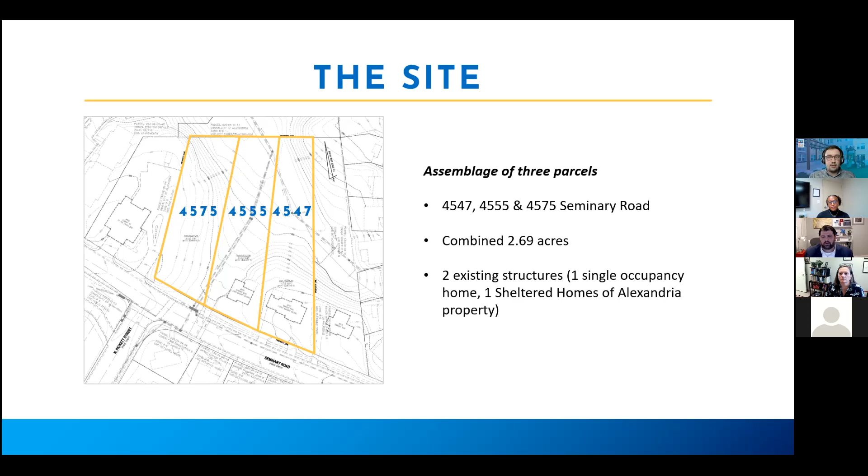So if we look just at the site, AHDC's project on Seminary Road is located on the west end of Alexandria. The project involves the assemblage of 3 parcels at 4547, 4555, and 4575 Seminary Road. In total, by combining these 3 parcels, we are creating a developable site of approximately 2.69 acres.

Currently, there are 2 existing homes on the site. 4547 is a single-family home owned and operated by Sheltered Homes of Alexandria, a local nonprofit that provides housing for individuals with intellectual and developmental disabilities.

They own and operate a number of group home and congregate living homes throughout the city. As part of this project, the current residents at 4547 Seminary Road will be relocated and will continue to receive services through SHA in the city. At the conclusion of the project, all residents will have the opportunity to move back into the new SHA units that are part of the project.

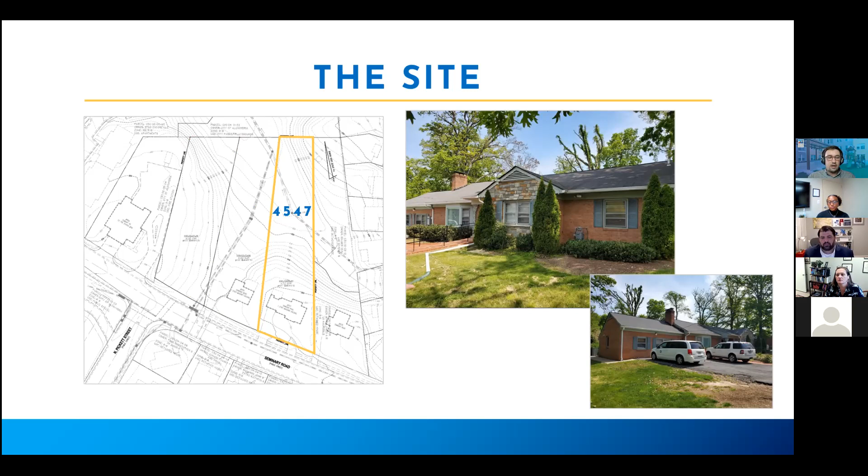AHDC and SHA recently completed the Bellefonte redevelopment in the Del Ray neighborhood of Alexandria. AHDC is excited to have the opportunity to partner with SHA on another project.

Moving west on the site, the second existing home is at 4555. This parcel is owned by a third-party private landowner.

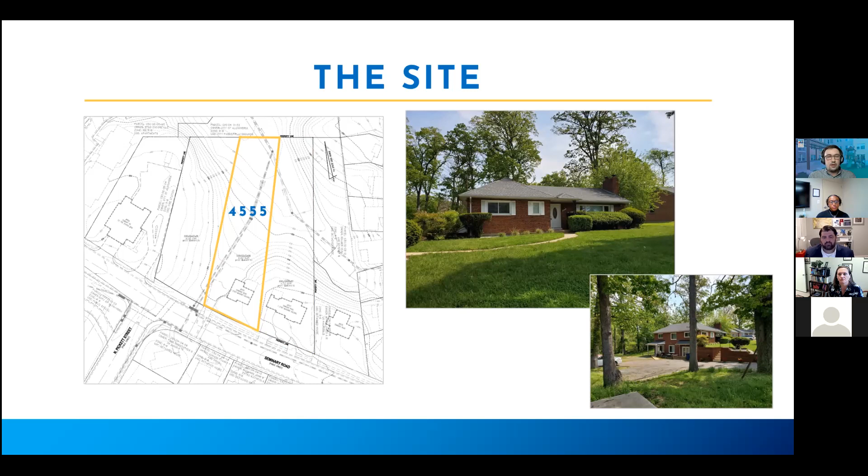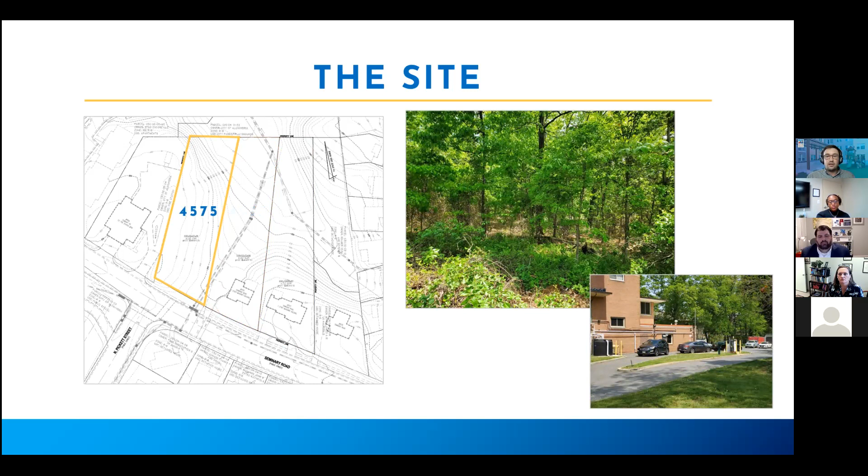Finally, the parcel furthest to the west is 4575 Seminary Road. This is a city-owned vacant parcel. At this point, it is mostly wooded and sits next to the parking lot of the fire station, immediately to our site's west.

Another feature of the site that made the design a challenge is a wetland of minimal ecological value, as determined by the Army Corps of Engineers and the Virginia Department of Environmental Quality. This is located at the northwest corner of the site. As part of the development, we are maintaining a 50-foot buffer around the wetland in which we are not planning to build.

Finally, the site topography has generally been a challenge and will require regrading in some locations to allow for the drive that is internal to the site and for the homes.

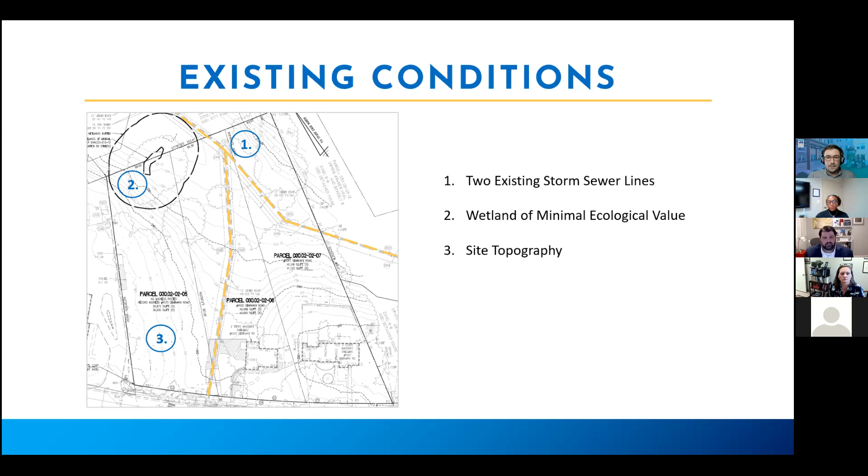Before moving on to our most recent design, I do want to discuss how we arrived at our proposal today and the evolution of the project. We've been working on this project for more than a year, and our first official submission to the city was in September of 2020. At that time, we proposed a larger multifamily building with approximately 52 rental apartment units.

Our initial design had some issues that didn't make it a good fit for this site. First, we received pushback on the scale of the project, specifically the larger rental building on the western edge. Second, the entrance off Seminary, which was not part of any signalized intersection or aligned with Pickett Street, was not acceptable. Third, as we would later identify, the multifamily building was proposed to be built directly on top of the wetland at the northwest corner of the site.

These issues required a reanalysis of the site and our development plan. This led to our second submission in February of 2021. This submission was significant in the life of the project because it saw a shift to a 100% ownership project.

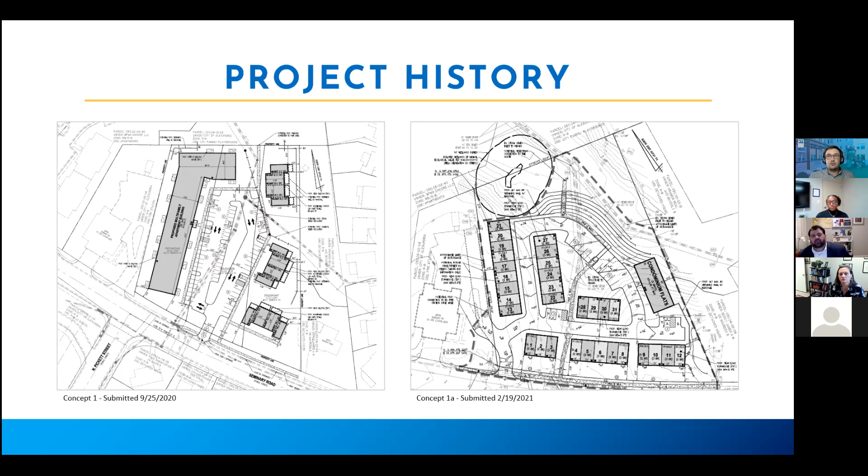In this concept, there is no rental housing on the site. This design avoided many of the previous pitfalls, such as building in the wetland and the location of the site entry, which in this concept, we adjusted to align with Pickett Street at a signalized intersection.

After this submission, we continued to revise the design. We submitted something called Concept 2 to the city in May of this year. The layout of the site remains similar, but our team started adding details like landscaping and architecture. After conversations with the fire department, we also created a separate entrance to the site to ensure that the fire station maintained complete control over their existing entrance.

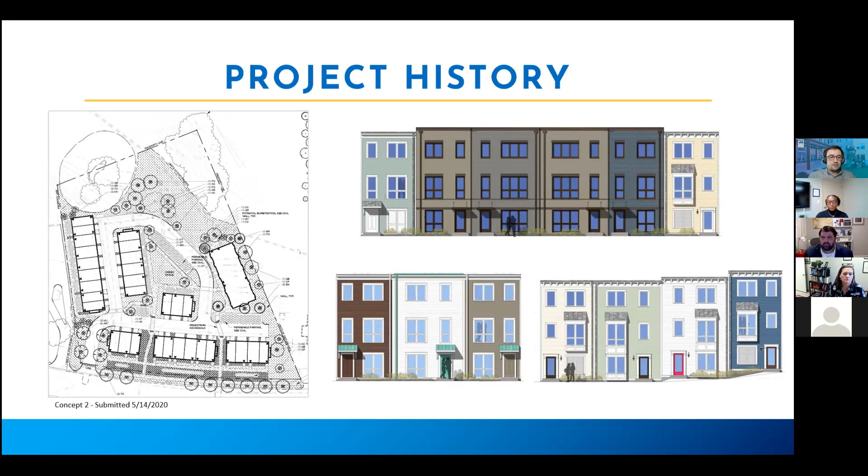This brings us to tonight's meeting and our current design. Today, we are presenting what is called a DSUP completeness submission, which we submitted to the city initially on August 6th and revised on September 14th. We are currently awaiting city comment on this submission.

Like our previous homeownership submissions, the current plan for this site includes 31 townhomes, which are a mix of 2 and 3 bedroom units. We are still proposing a mix of 16 2-bedroom units and 15 3-bedroom units.

Each townhome is 3 levels with a lower level garage, an open concept main living area, and upper floor bedrooms and baths. All townhomes are targeting households at or below 80% of area median income.

There are an additional 3 units in this building that will be owned and operated by SHA. As mentioned, these units will each have 4 beds and 4 baths, and each resident will have their own ADA accessible bathroom.

The project has a number of other features I'd like to highlight tonight. First, as we showed in previous concepts, the entrance to the site is still aligned with Pickett at a signalized intersection, and the entrance is again separated from the fire entrance.

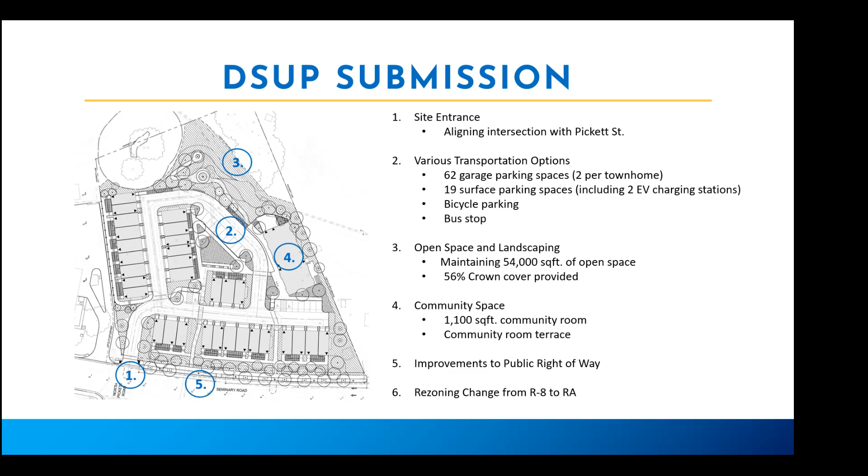As part of the development, we are also providing community space. This includes a 1,100 square foot community room in the condominium flats building. There are also numerous outdoor gathering spaces, including a terrace off of the community room, a central lawn with seating walls and benches, and sitting areas throughout the rear of the property.

We are also making a number of improvements to the public right-of-way, including installing new sidewalks along Seminary, and we will also be undergrounding the existing overhead utilities that run the length of the project.

Finally, as part of this project, we will be requesting a rezoning modification from the R8 zone to the RA zone. In previous submissions to the city, we had requested a change to a commercial zone in order to accommodate the redevelopment of the existing group home that was on site.

Working with city staff, it was determined that a change to a commercial zone would not be required and that the current project could be accommodated within a residential zone. We'll be happy to answer any questions about this change during the Q&A following the presentation.

Now I'd like to turn to the architecture, which is one of the most significant areas of improvement from the last concept. Here you can see the townhome designs from our last submission. The initial response to these designs was mixed at best.

What you see here are the units that now front Seminary. Before, these units were too modern and had a mix of brick and siding with colors that did not fit with the homes on the street.

We think our design team has dramatically improved these units. All units fronting Seminary are now brick faced. The more modern architectural style has also been replaced by some more traditional touches, such as the window bays on the 2-bedroom units and the cornice details along the roof lines.

These same design elements are present in the condominium flats building, which gives the development some cohesive elements while retaining uniqueness between the different townhomes.

The other important change, which is not easily seen here, is the change in building plane. Before, the faces of all units were in a single line, but with this revision, the 2-bedroom units now protrude 2 feet in front of the 3 bedrooms, which helps to break up the units and also provide more interior square footage in the 2-bedroom units.

So for instance, what you see on your screen here on the left-hand side is a 2-bedroom, a 3-bedroom, and a 2-bedroom. The breaking up of these units provides two feet of additional space and the window bays.

Townhomes 14 to 22 are along the western edge of the property, which faces the fire station and the Encore apartment buildings. These units were always the most modern units in the development, but they've still seen some significant changes. This stick of towns is now a mixture of brick and siding, with the brick units closer to Seminary on the right side of your screen.

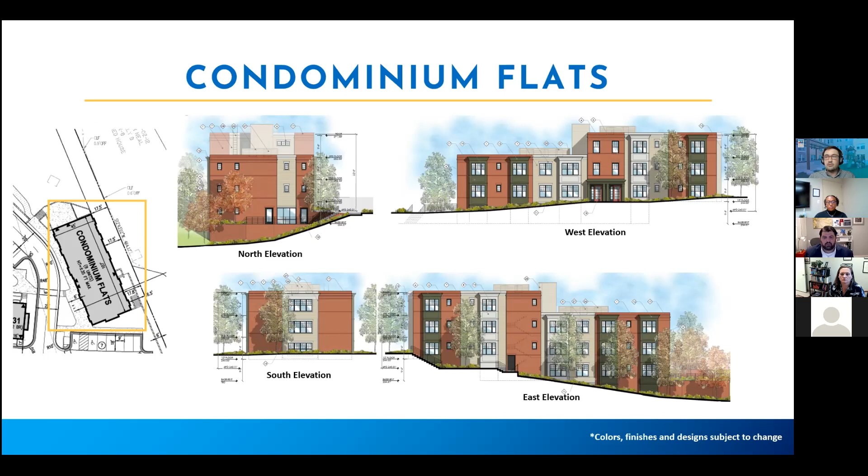Now, before ending this discussion on the unit designs, I do want to speak in a bit more detail about the building heights. All townhomes in the development have a maximum height of 35 feet.

The city's stormwater regulations are pretty stringent. If you're building a project in Alexandria, you have to meet 2 different criteria as part of the process. You have to deal with water detention, and you have to deal with water quality - quantity and quality, as Daniel describes it. So as part of this project...

We capture the water on our property through BMPs, best management practices. They'll have some green roofs on the buildings, but mostly it's directing water captured in downspouts into a raised planter that holds the water. It has a filtration device inside, so while it holds the water, it's also filtering it before it's released into the stormwater system that flows through this property. We have to capture the water on the property, and also treat it to reduce pollutants before it gets into the storm system. That's a layman's depiction of what our stormwater regulations require.

What I always say, and I believe this is true, is that every development in Alexandria has to make the stormwater condition better than it is now. Right now water just freely flows through this property without any ability to capture or treat it. Now we will be capturing and treating that water as it moves through. So I'm going to turn it over to Daniel.

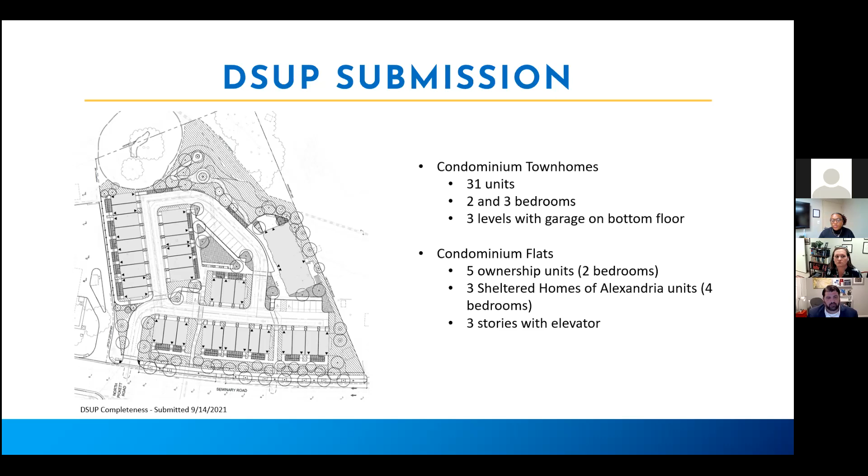Thanks, Mary Catherine. Next question we have is, why will units 14 through 22 be so different than the others? Can you describe the impact cost on having 2 different architecture styles in the same project?

I don't really understand the second question about the cost of having 2 architecture styles. I will speak to this - we thought there was room to have a little bit more of a modern opportunity, so that not everything was the same on the stick of towns facing the fire station, which may or may not have future redevelopment and doesn't face the more traditional Stonebridge and Seminary Road. This is where we thought we could mix up the design a little bit to create some unique features throughout the project.

The next question is asking which parts of concept 2 submission do not comply with current zoning and the small area plan for the site - may you please list them? Could you repeat the question, Brianna? Yeah, sure - which portions of concept 2 submission do not comply with current zoning and small area plan for the site? Might you please list them?

Well, we're not at concept 2 anymore - we're actually at the DSUP submission. What we asked for was a rezoning so that we could have a townhouse development and a small multifamily building in this development. So that's called a rezoning application, to the RA zone, which is a residential zone. Between concept 2 and the residential zone, we were able to work with the city to determine that we didn't need a commercial designation for the SHA houses, that we fit within the definitions under the zoning ordinance so that we can work within the RA zone. And so that's the request to change.

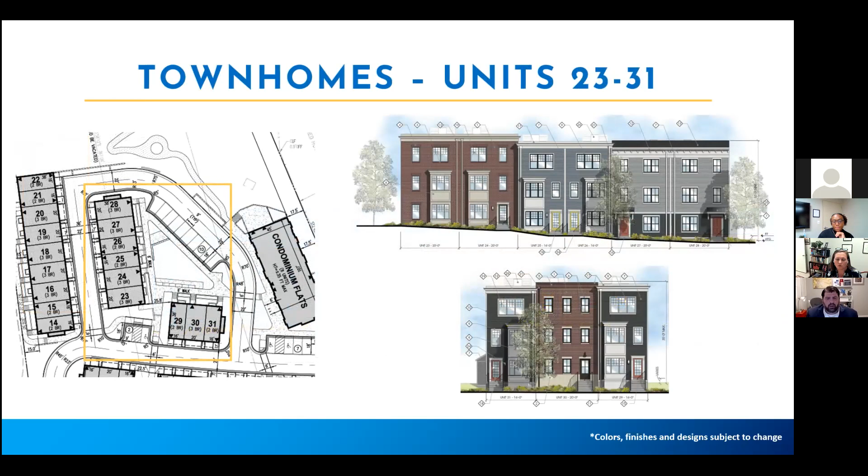So the northwest side, these are the townhomes we just discussed that face the fire station. If you look at the site today, there is a grade that's higher on this property line and then slopes. That grade, for the most part, will remain, and that's what gives you a 2-story look on this side. But as you go to the interior roadway, they would look like any of the other 3-story units. Each one has a garage off the interior roadway on a 3rd level, a lower level, and then the ground floor where the living floor is, and then again a 3rd story.

From the western property line, these are approximately 23 feet, and from the interior roadway they would be 35 feet, similar to all the other townhomes in the development.

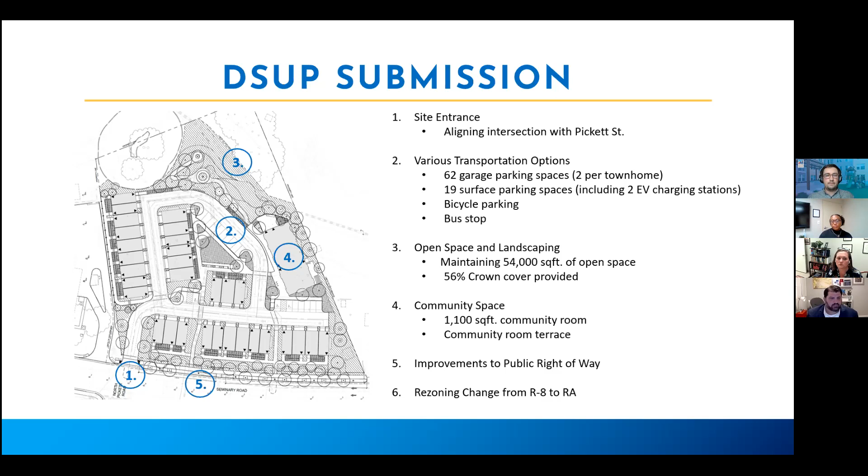Thanks, Matt. The next question is, what's to prevent multiple families from living in a single unit?

I'm happy to take that one, John. There are regularly rules and regulations of the condominium association that will be adopted that will require each unit be occupied solely by one family unit.

Thanks, Mary Catherine. The next question is, will ownership of units move down in generations? How will that work?

They absolutely could. You're gonna buy your condo or townhouse, you're gonna own it. There will be a deed restriction to maintain it as an affordable unit, requiring that if you ever wanted to sell it, you had to sell it under the same guidelines, which will increase over time like the same income guidelines recognized by the VHDA. You can only sell to people who qualify under those same guidelines. You'll likely have to put it on the market, and what normally the city has done in other instances is go to the group of people who have already pre-qualified under the city's homeownership assistance program as a family who qualifies under the income guidelines for that unit.

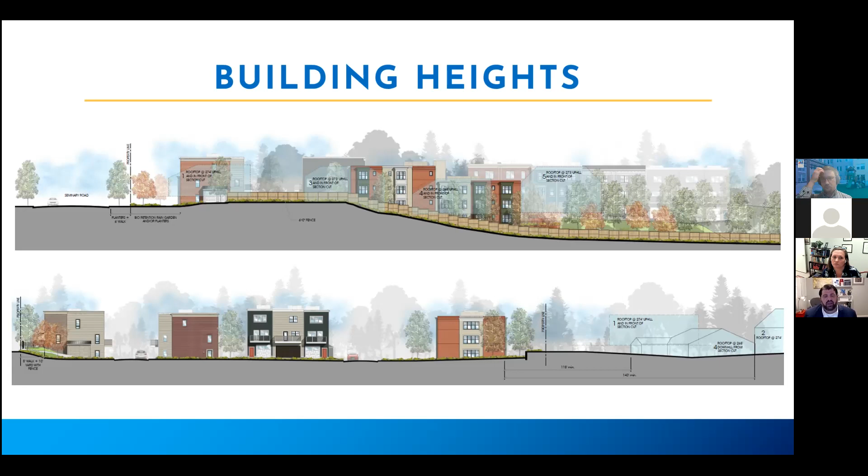Well, we are applying for this development and we would have this project approved. If we wanted to change that to high density housing, we would have to go through a full rezoning and development process. The only adjacent single family house to this is Miss Muncie's house, and we haven't spoken to her about acquiring that property, so I don't know. It's a hypothetical question, but any process or change in density would have to go through that full review.